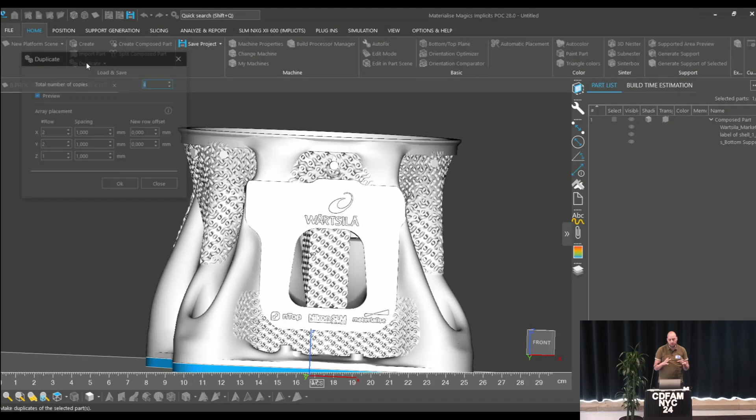As Bradley showed yesterday from NTOP, what we have done now is also added the implicit kernel from NTOP. Because making all these crazy designs is awesome, but getting them printed is a totally different thing. So we have integrated the NTOP kernel natively in Magics.

So if you have your crazy designs that you want to print, like heat exchangers for example, I have noticed that heat exchangers are really hot right now, so that's awesome to see.

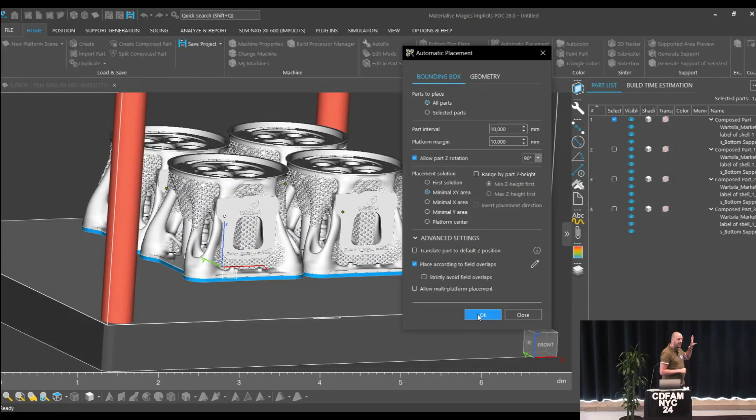We can now push them without any conversion to a mesh or whatever, all the way up until the print. Data prep, build prep, but also slicing and so on is now done natively on an implicit level. So that means you have significant speed and performance increases.

This was not printable at all, was not sliceable at all with current technology. And what now happens is that you can slice these complex platforms.

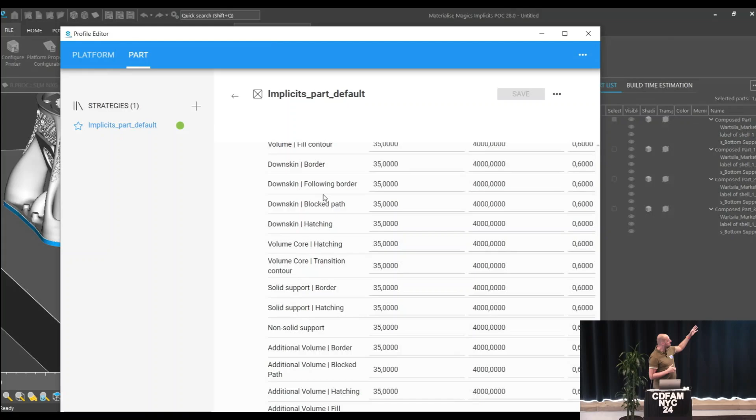This is just a miniature version. The real part is 60 centimeters by 60 centimeters by 45. You can print 4 of them on the SLM 600 machine, and slicing takes only a matter of hours, like 3 to 4 hours. That's a game change from unsliceable to 4 hours.

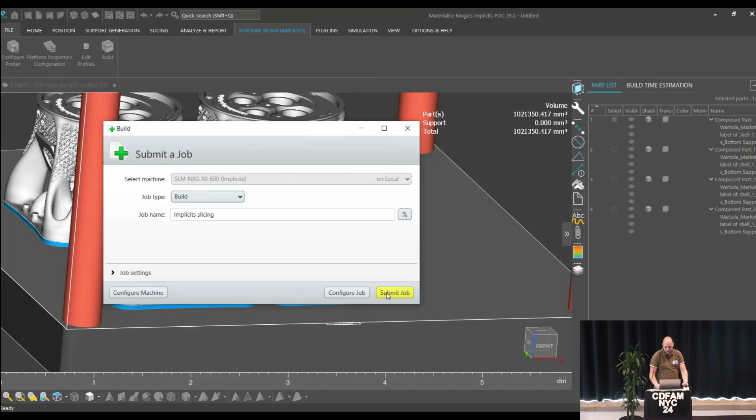So this is one thing, but this is only on the Magics level. Magics is the user interface. What we're now going to do to push this to the next level, because we can't keep adding kernels to our Magics system ecosystem, is we are opening up our secret sauce.

Magics has also always been perceived as being protective of its algorithms, but as Brigitte also said, to really push collaboration in the industry, we have decided that we're going to open up the Magics SDKs and the Materialise SDKs, available for the full end-to-end production flow.

That means all the algorithms that we have, and we really love our algorithms, we have over 800 on 3-matic, on Magics, on the build processes and so on, we will open them up via SDKs that you can use in your own workflow.

I'm going to give you some examples of what we have done behind closed doors, because this is not a product yet, so we're going to push this to the market soon.

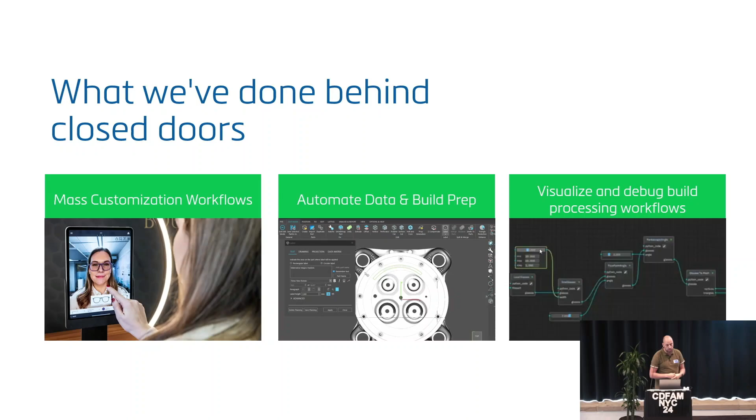We have been validating this with mass customization workflows, with automation in data and build prep, as you have seen in Magics itself, but also created a visualization tool, because it's really important that we still create a full end-to-end solution to make sure you have all the tools available at your disposal.

So how does it work? At first we started to change the core of our algorithms. Our algorithms are written in C++. C++ is not really scalable to everybody, so we have changed those algorithms and pushed them to a Python algorithm. So that's one thing.

We changed the user interface from Magics all the way to a nodeflow editor. I have seen from all the presentations here today and yesterday that everybody loves a nodeflow editor, so here we are. It's also available there.

But documentation, and this is also something we have seen during the presentations today, was from Metafold, from Daniel. Making your SDKs available is only one thing. Documentation is key, making sure that people can use your SDKs, that they're all documented.

And we have a full library. Every algorithm is documented on how to use it, how to implement it, and so on. So this will be made available really soon.

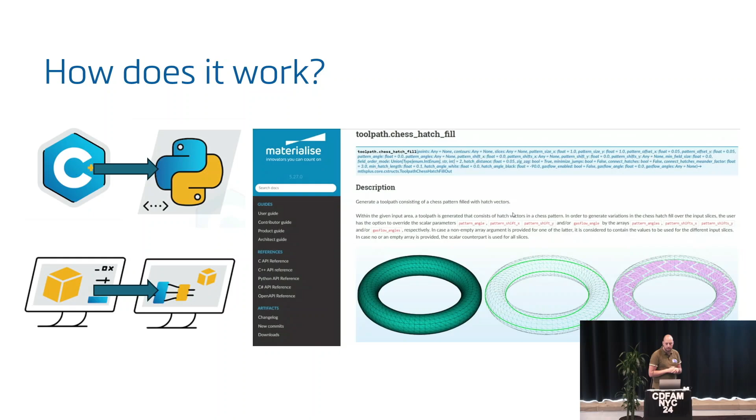I want to give you an example of the real power of having a full end-to-end workflow based on the Magics SDKs. So I was thinking, okay, what kind of application can we use? First I thought, okay, heat exchangers, we have to do heat exchangers, it's really powerful, but I'm lucky that I didn't choose it. I'm happy that I didn't choose heat exchangers.

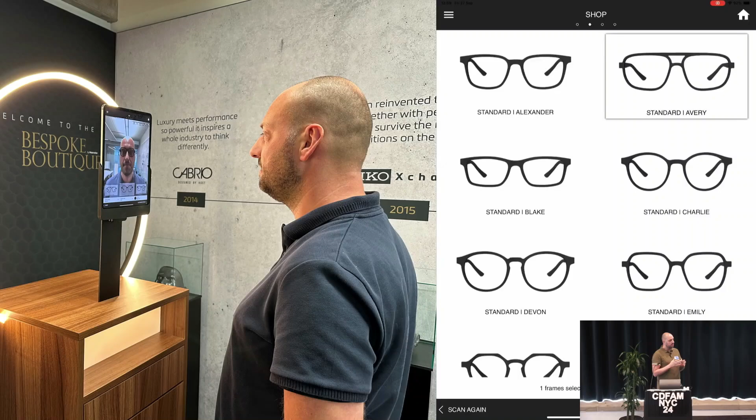I went for eyewear. So what you see here is basically a flow on eyewear. It's a little bit stuttery apparently, the video, but I can guarantee you it's smooth. Basically you can go to a boutique, get a scan of your face, and all the designs of the glasses are part of an inventory. But not one face is the same, thank God.

But what you can do here is add your designs that you want, and those designs will be automatically adapted to the shape of your face. You will get a recommendation out of this.

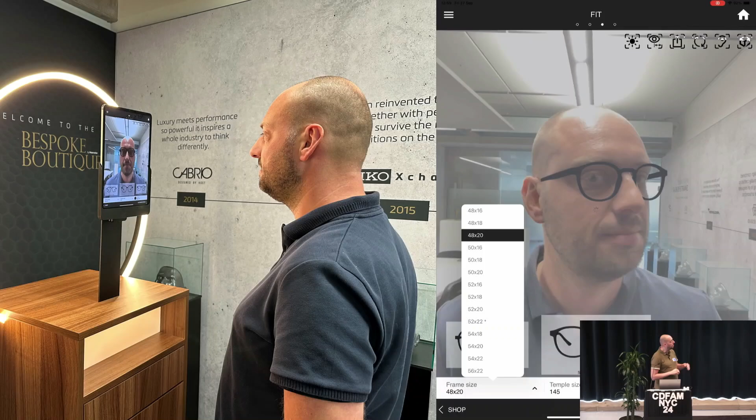You can change your styles as well, and then you can start swiping. I want to have those glasses. You can override it if you want to, but it's not suggested, of course.

Afterwards, you get a full customized eyeglass frame based on the shape of your face, and you get a very nice 3D scan of your face out of it. Not as nice as the rig that we saw yesterday, but it's still pretty good.

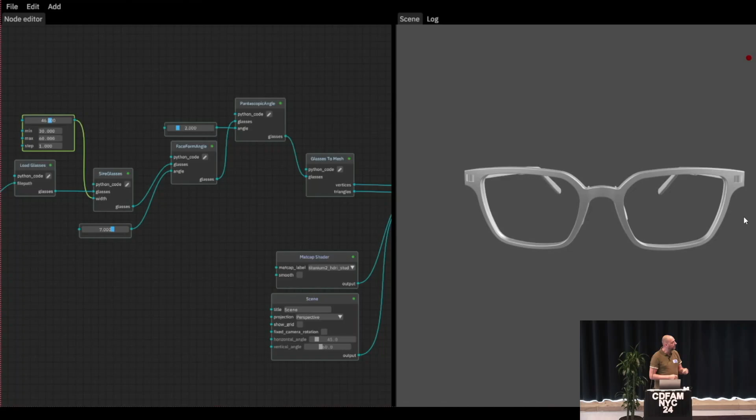When you press buy, you trigger a fully automated process—and I heard Ben, there's no 100% automation, you can always override this, as you see here. You trigger an order, a launch to order based on the Magics SDKs. So what you see here is that you can still do small design changes.

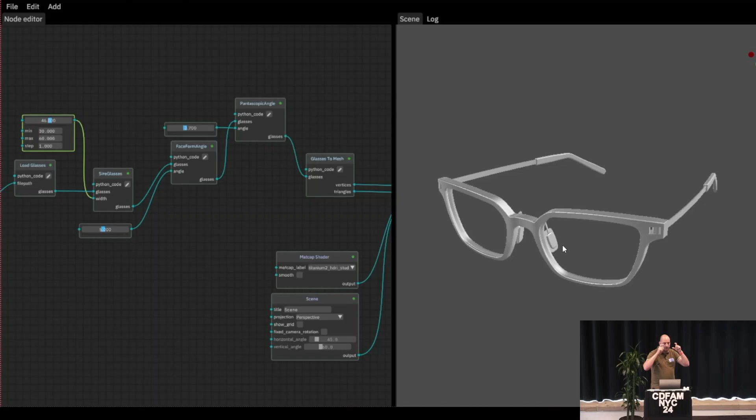You have to take into account that this is based on the geometry of your face that you just scanned, so the design of your frame will be automatically adapted to your scan, and there will be some adjustments made. For example, the pantoscopic angle is changed to make sure your lenses reflect well to your eyes, based on the scan data that we have. And you can always override this as well.

Now afterwards, if it's based on metal eyewear, you can start doing your build prep. One thing we know is with support generation, if you add supports and then have to do minor design changes, the difficulty is that you lose your supports. There's nothing as annoying as losing your supports after you're done and having to start over.

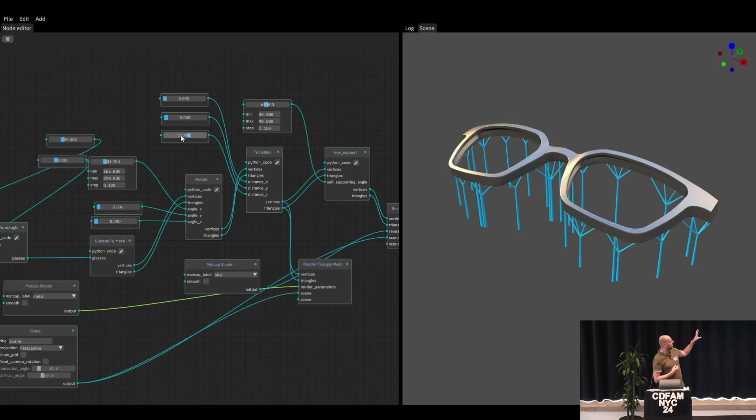So with these algorithms you can create a support strategy and then have full preservation of your supports based on the data you get in. Every time an eyewear frame comes in, it will be automatically changed and adapted according to the changes that need to be done.

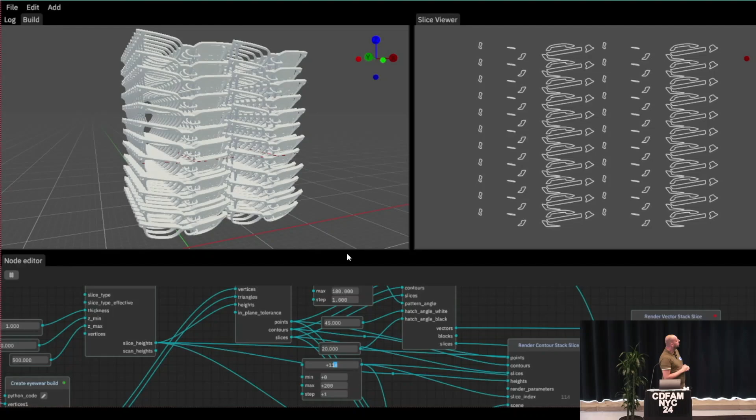Now, most frames are built in nylon, so that means you can also nest them. As we saw, nesting is really difficult to do, but especially for those polymer eyewear frames, quality is extremely important. So what you can do—and this is really unique and powerful that we will enable for you—is make your changes based on slice level as well.

So you can have full associativity within the workflow: you can add your blocks, create your slices, do your hatches, and out of that still make changes that are fed back into the nested build as well. You can make changes on slice level, on hatch level, and it gets fed back into the workflow. So that's very unique.

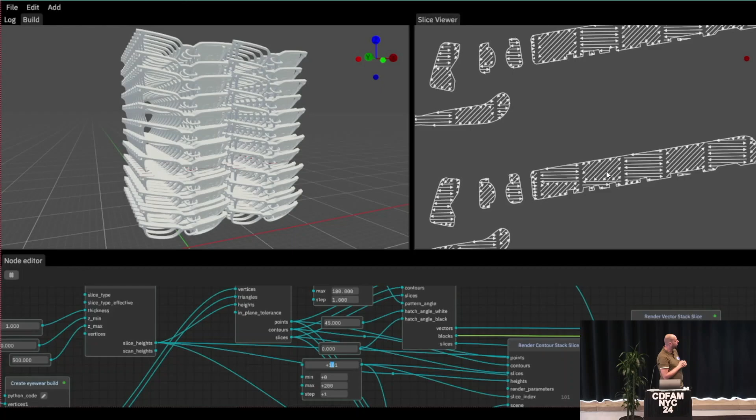This is also the main reason why we created our own node flow editor, because we have to be able to visualize and render this as well. But if you're using Grasshopper or Rhino or whatever automated workflow, you can also integrate these SDKs. This is really powerful, and something we will enable as well.

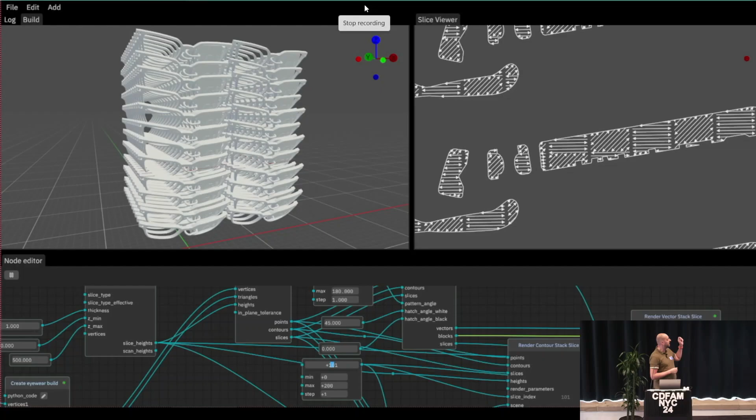But why are we doing this? Again, the openness—we really want to share our SDKs as well to push this to the end. This is really unique because at this moment in time, you can actually have one workflow from design to a fully printed part, that is fully traceable, with full associativity in the workflow, and you can always have a check within the workflow itself.

So why are we doing this? Again, optimizing and reducing cost. Manual and repetitive tasks take a lot of work and a lot of time from highly educated people. We want to scale production with automation—automation really is key for scaling—but we also want to decrease the time to market for AM applications. This is really our way to plan, manage, and optimize every step in the 3D printing process.

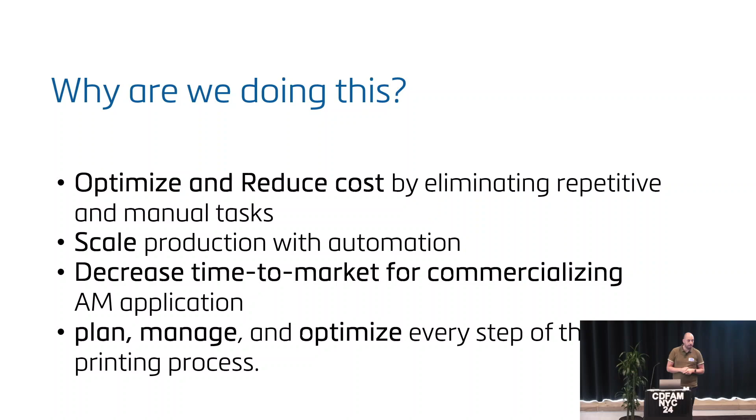So if you're interested, let me know. If you're already a Magics user, we can start talking about leveraging this. If you're not a Magics user and you want to integrate these SDKs into your workflow, we can definitely explore what's possible there as well. This is our way of sharing and opening up our ecosystem—all our 800 algorithms will be made available via an SDK, and you can have an additive manufacturing block into your own workflow as well.